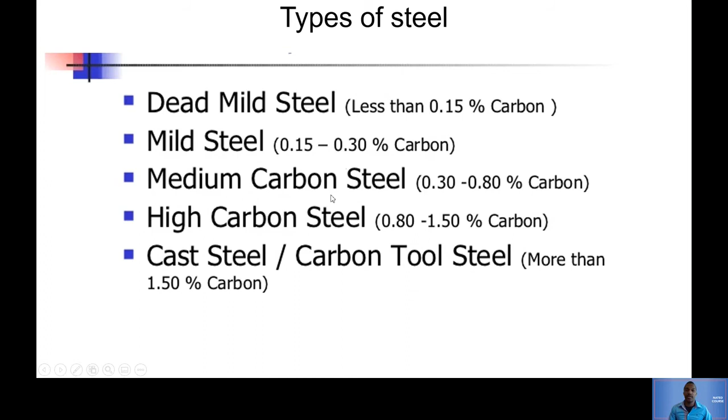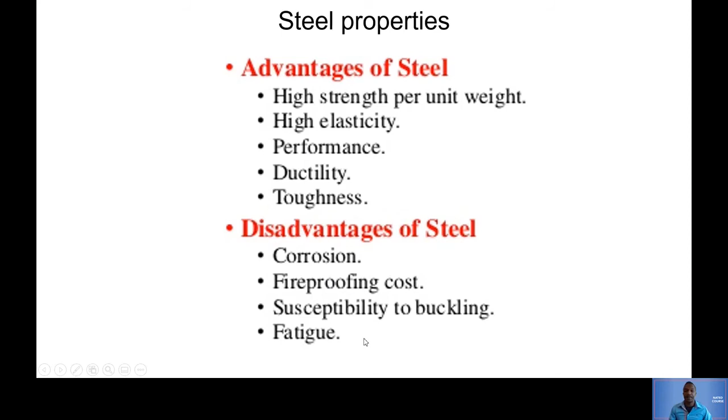Fire safety. So one of the measures you can take to fireproof steel is by putting concrete around it, because concrete is very good when it comes to fire resistance. It can resist fire, concrete.

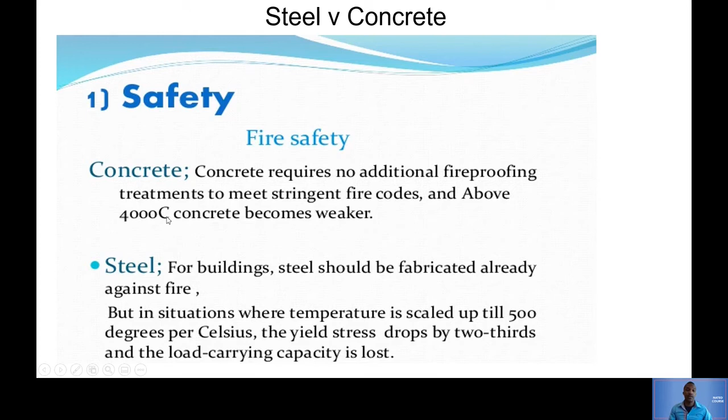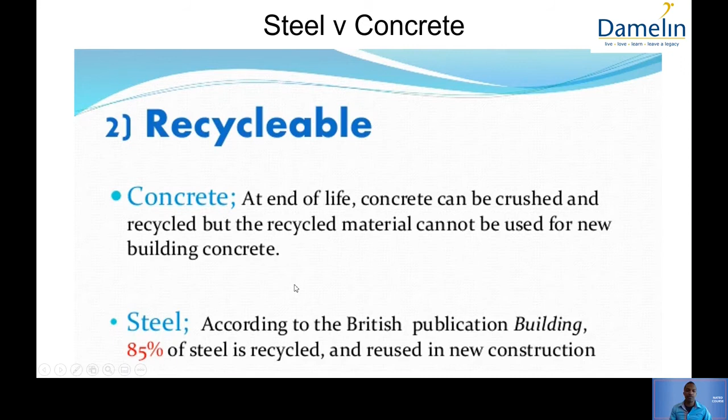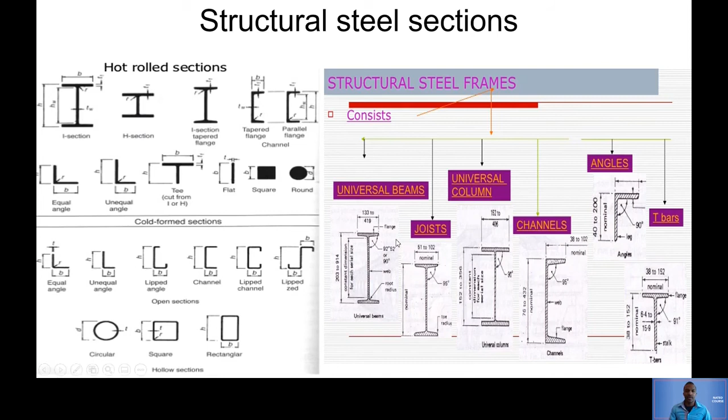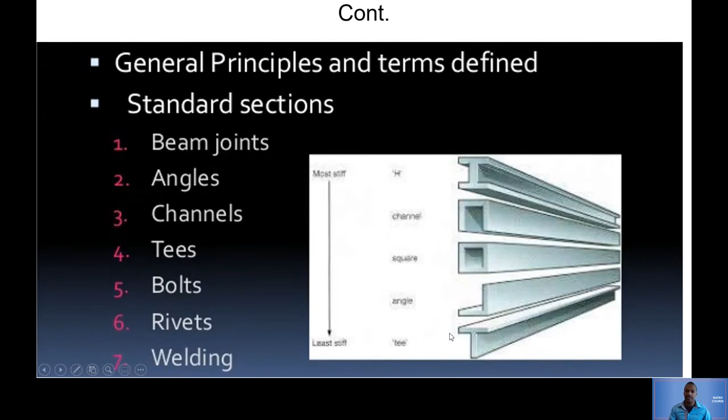Okay, all right. So here we go. General, just the shapes again. That's an H section. It looks like that when it's standing upright. This is a channel shaped like a C, a square. As you can see, it's a hollow square. An angle, it's not called an L, but it's called an angle. And then a T.

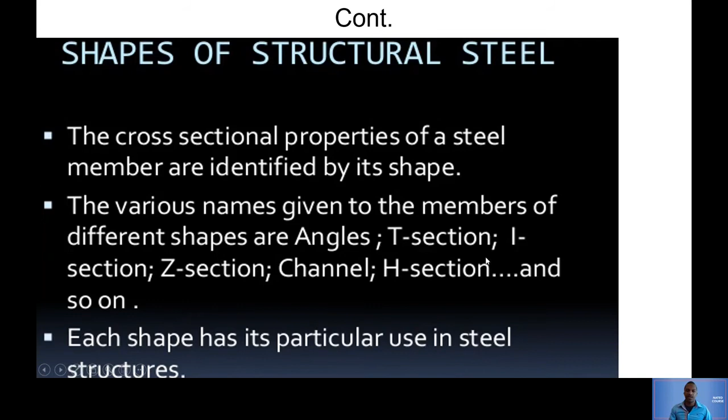Okay, so different shapes. This is just saying that there are different shapes in steel. It's T section, I section, channel, H section - we've spoken about this and you've seen them.

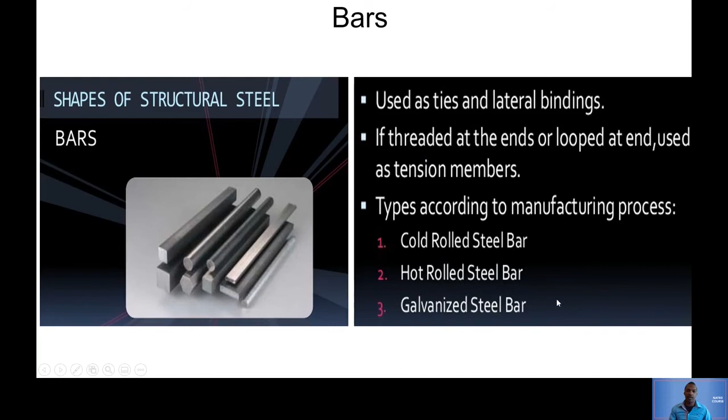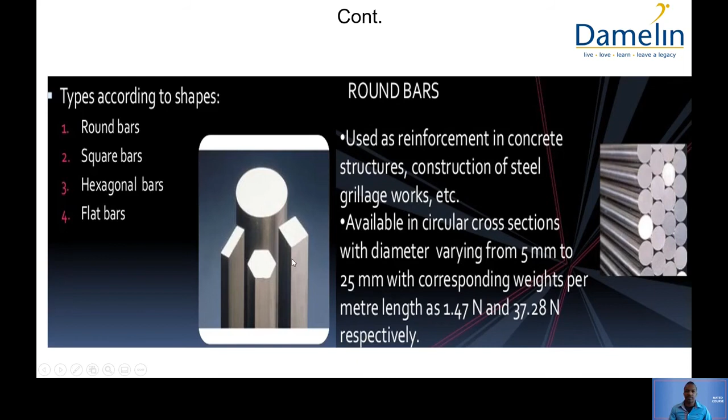Types according to manufacturing process, well, there's different kinds of bars as well. Cold rolled steel bar, hot rolled steel bar, galvanized steel bars - all of these are different types of bars. Okay, so we got round bars, square bars, hexagonal bars, and flat bars. Those are just the type of bars. This is just some information on round bars.

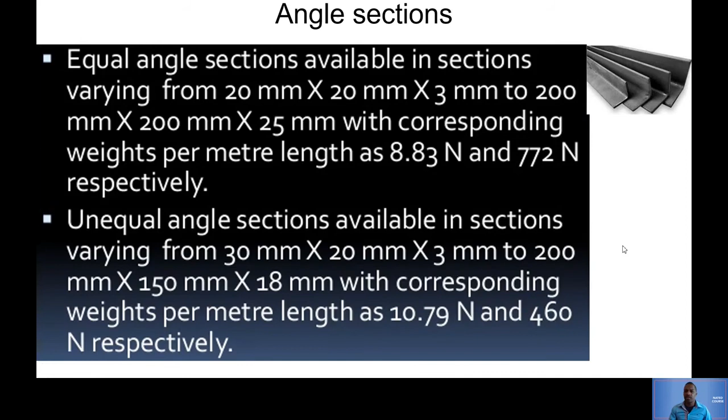Not really important. Equal angle sections available in section - these are just information on equal angles. There is the picture of equal angles. Once again, these are just demonstration of them. More information on equal and unequal angles, as you can see in this picture.

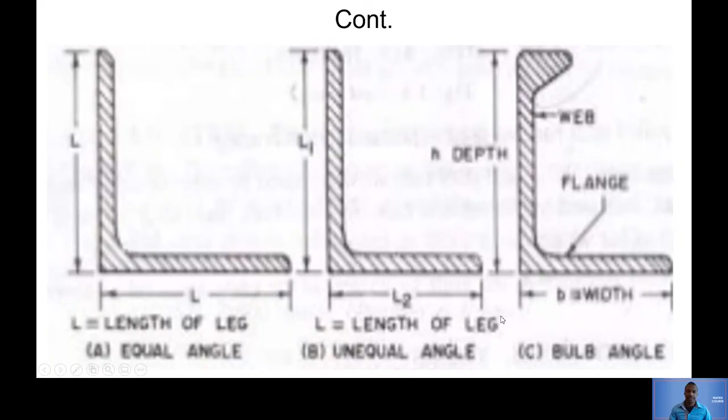Angles. And then channels, there are channels shaped like a C. The reason we're repeating this is so that we can kind of cement it in your head, so that when the exam or test has a question and it asks you to draw a channel, you will know exactly what to draw. It's shaped like a C.

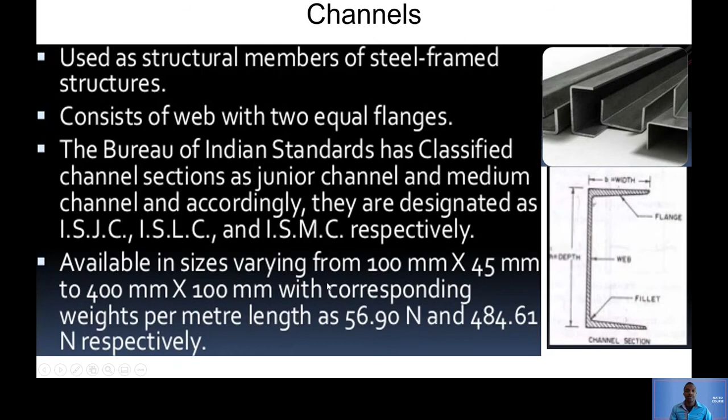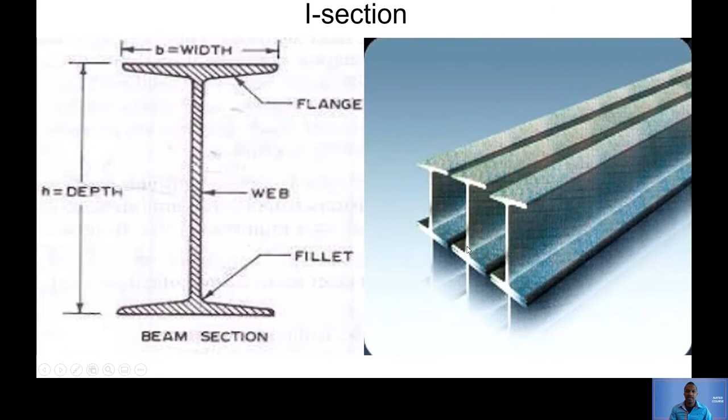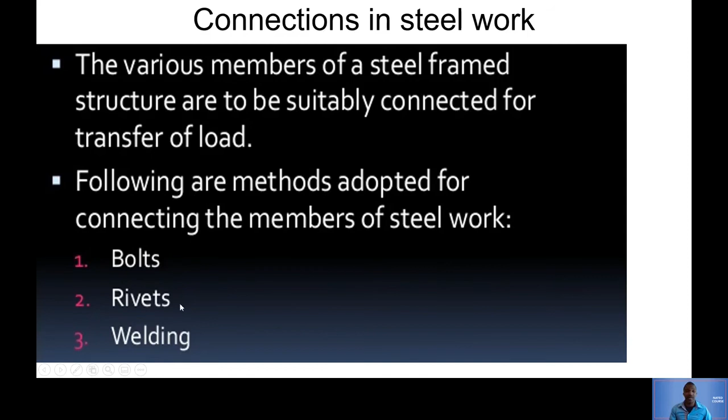Now, the connection of steel, right? So when you are connecting steel, there are basically three ways you can connect steel. Like when you're, let's say you're doing a beam and a beam and you want to connect those two sections, you either connect them with bolts, rivets, or welding. Okay, let's go through each one of them.

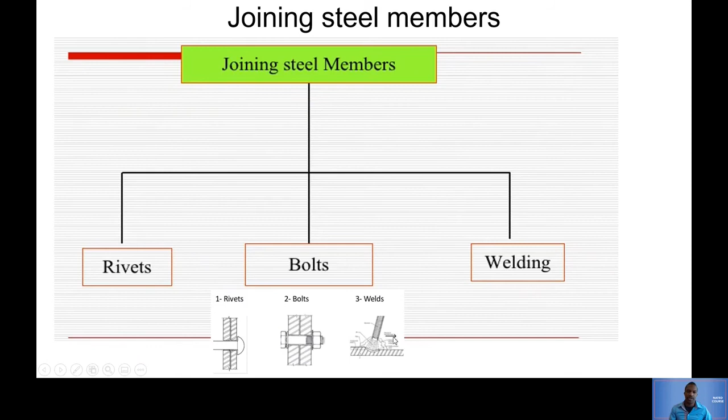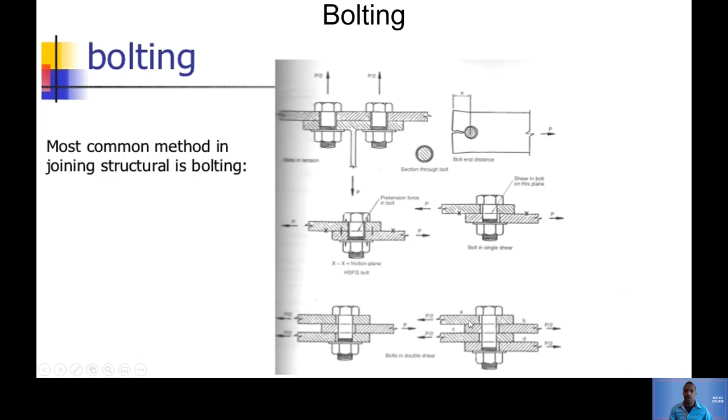Okay, let's talk about bolting. The reason we're starting with it is because it's the most common method in joining structural steel. You will see that everywhere you go and you look up at steel, how it was joined, you most likely see bolting because it's very common. As you can see, these hashed out parts are the two steel members that are being joined, and you use bolts, one on one side and a nut on the other side, just to join them. So you're joining two here, three here, four over there. So bolting is very popular.

It's used when you desire temporary connections, meaning you might want to remove them later. So if you want to make a temporal structure, such as scaffolding, you'd probably use bolting over there. You're not going to weld scaffolding because welding is more permanent.

It may also be adopted when it's difficult to use rivets for connecting members. Bolts are better suited for tension applications. They're very strong in tension because, as you can see, they are very thick and long, which makes them strong.

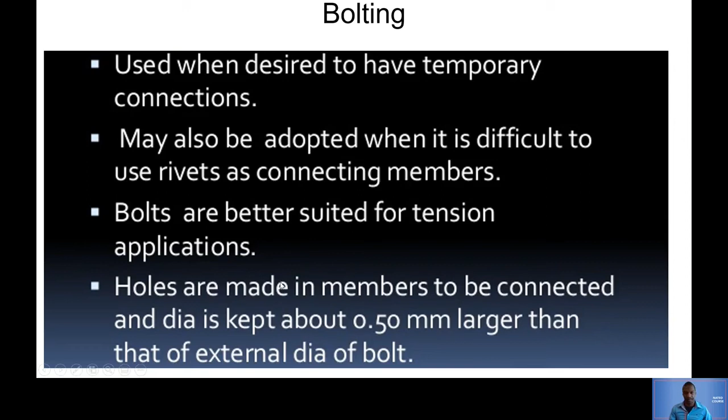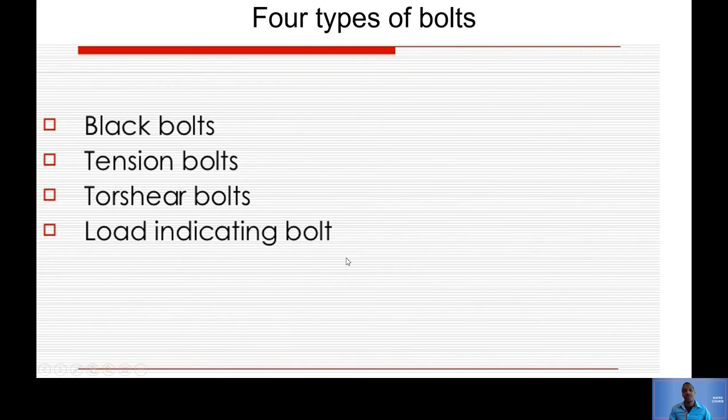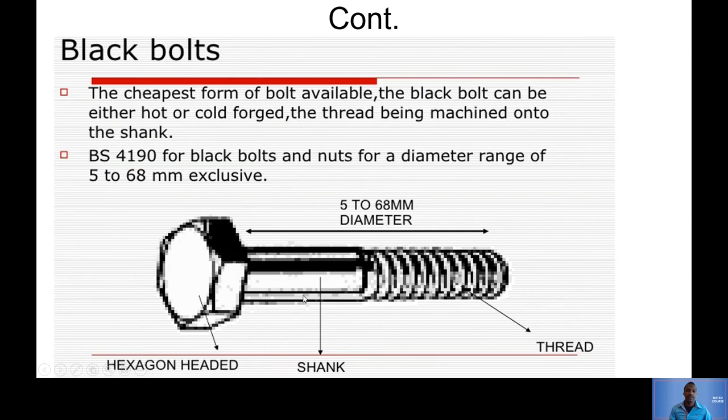So there are four types of bolts: black bolts, tension bolts, Torshear bolts, and load indicating bolts. Let's look at black bolts - these are the common ones. I'm sure you've seen them everywhere; every house, every object made of steel probably has this bolt, because it's the most common.

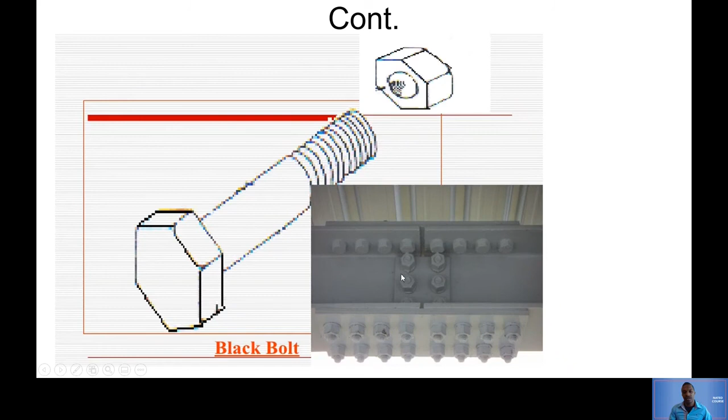Here's a practical example where you can see it in construction. This is a beam and it's got a series of bolts connecting it.

So tension bolts, as you can see, are a normal bolt with a nut and a washer added. This is a washer.

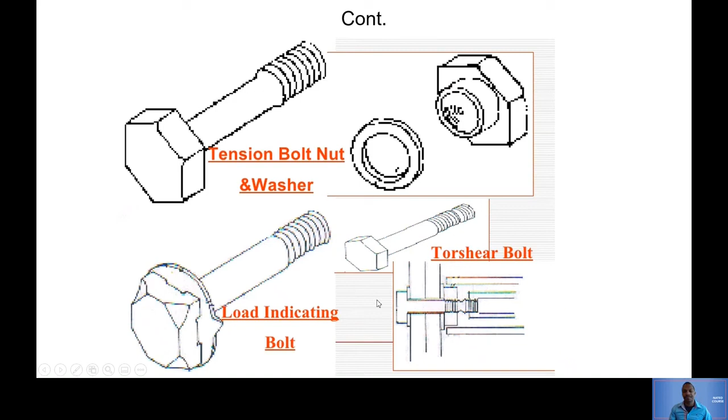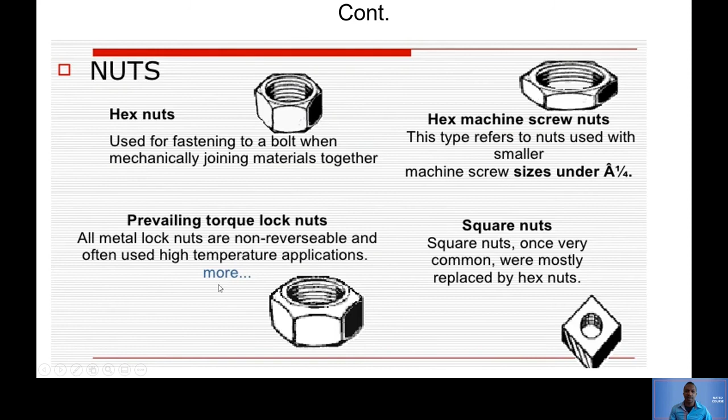So nuts are the connecting member, the screwing member of the bolt. There are different types of nuts as well - these are some nuts with washers, bolts and nuts. They always go together.

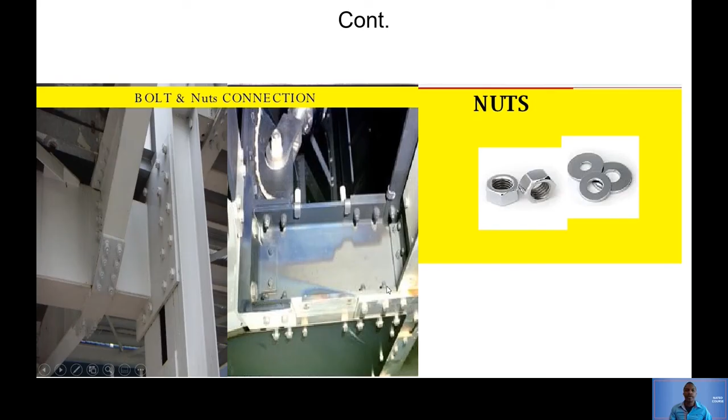Now let's talk about rivets. A rivet is a permanent mechanical fastener - it's more permanent. Imagine a nail, that's basically a rivet. It's a form of a nail, but for steel particularly, we call it a rivet.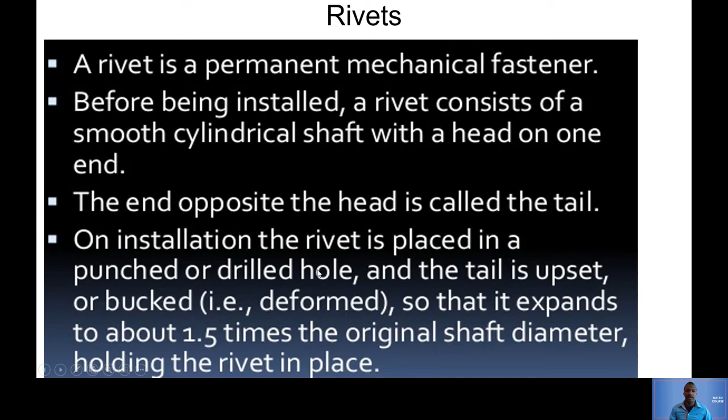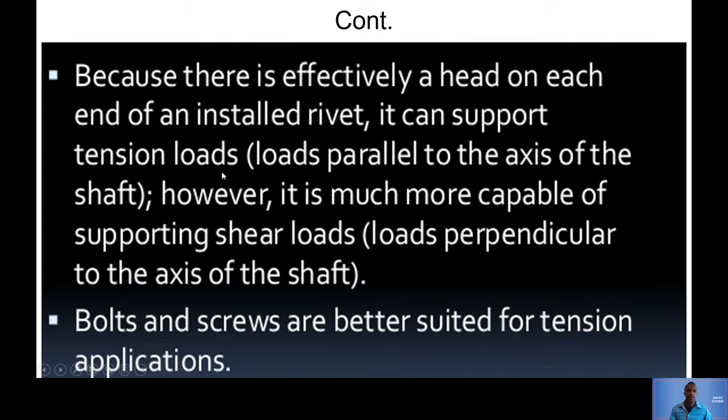Before being installed, the rivet consists of a smooth cylindrical shaft with a head on one end, just like a nail. The end opposite the head is called the tail. Because there is effectively a head on each end of an installed rivet, it can support tension loads, so it's also good in tension, just like bolts.

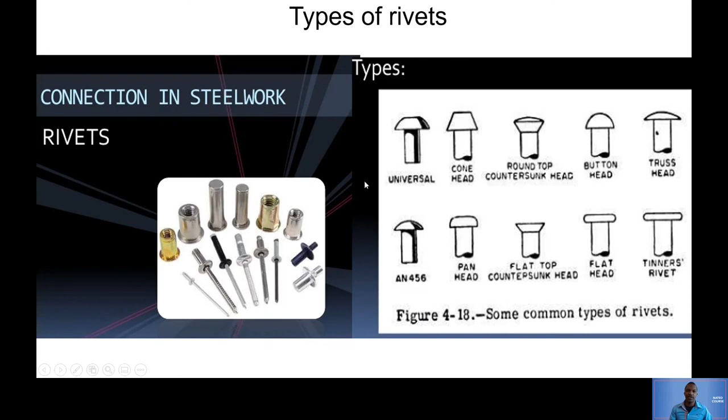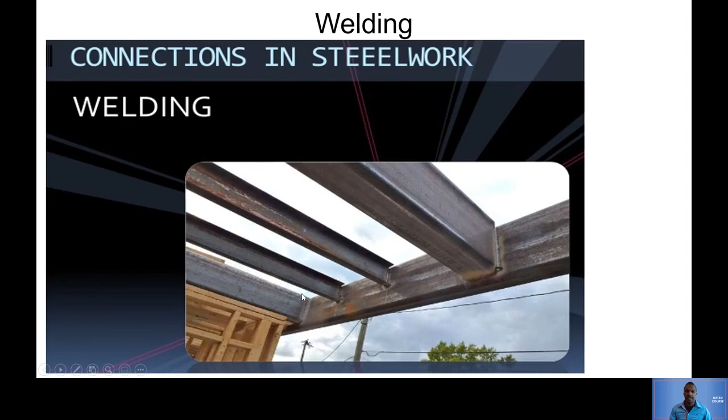Now let's talk about welding. Here's an example of welding. It's permanent. A welding joint is a point or edge where two or more pieces of metal or plastic are joined together.

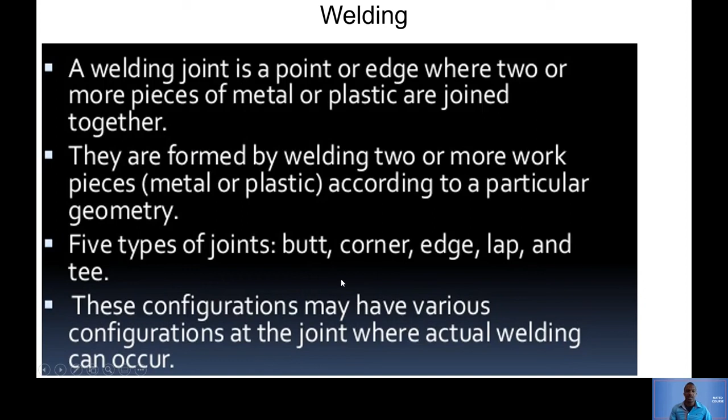There are five types of joints, and it's important to know them: butt joint, corner, edge, lap, and T. Let's look at each one of them.

The basic methods of welding are oxy-acetylene and electric arc. Welds are classified as fillet or butt weld - this is the important part, that it's either a fillet or a butt welding.

A fillet is used on the edges and ends of members, but butt welds are used on chamfered end-to-end connections. Let's take a look at what these things actually mean.

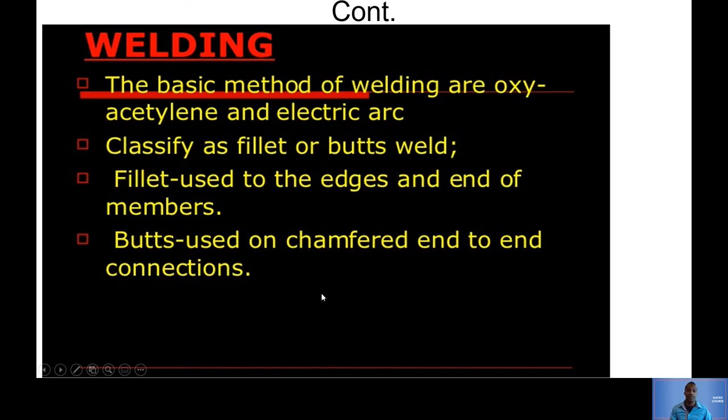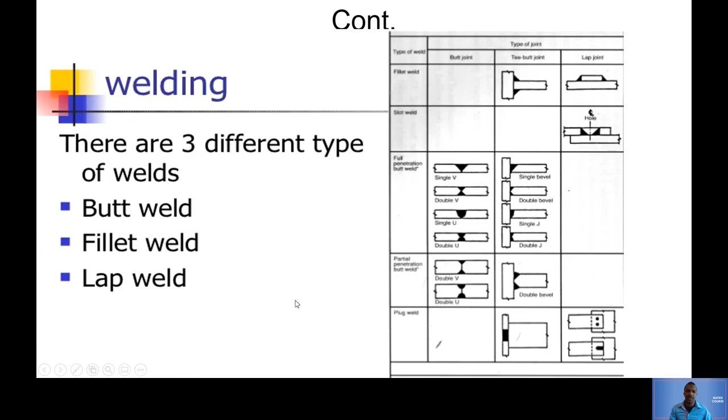Wow, okay, I see. Well, this is not very clear. So let's look at a different example.

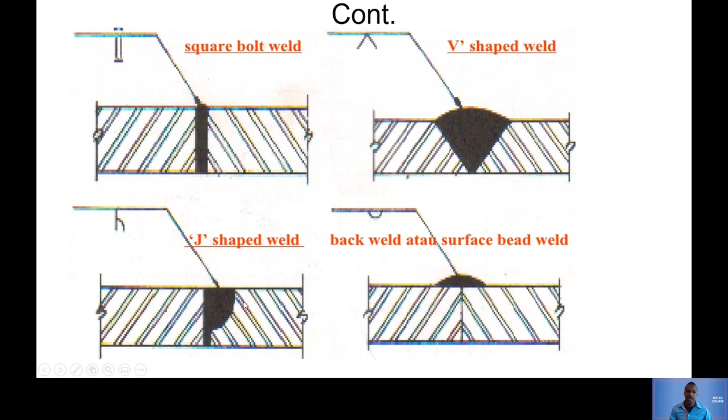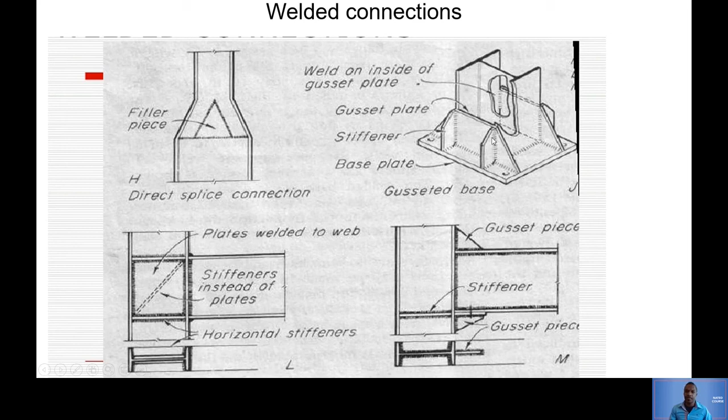Square bolt weld, so this is the welding over here, the black one. V-shaped welding over there, J-shaped over there, and then a surface welding. So if we look at this example here, you can see that there are different members, and all of them are welded, but it's not very clear what's going on.

So these are the types of joints that are done in steel. Either you do column based, which means joining a column to a column, or a beam to a column. A beam is horizontal, column is vertical, or you do a beam to beam joining. These are the types of joinings that you can do.

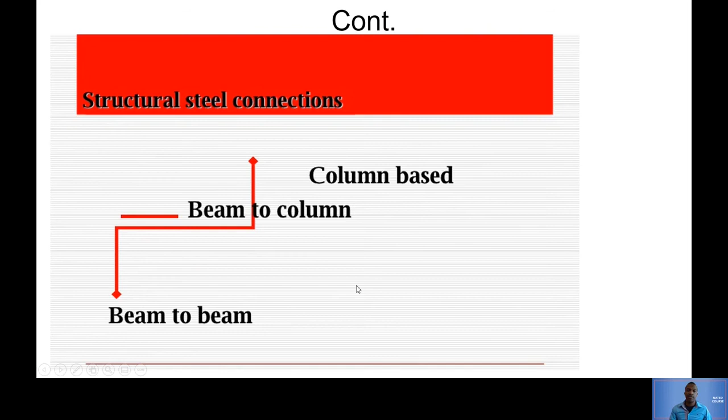Now, in doing those types of joinings, you can use bolts, rivets, or welding, depending on which one, or a combination, depending on your design. Okay, so here is a column-based design.

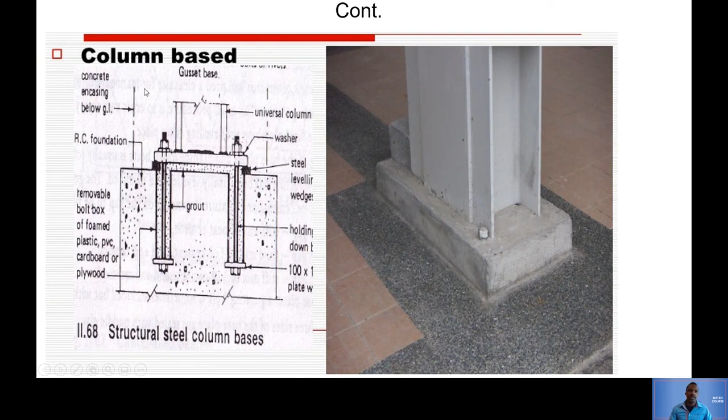And then, as you can see, the bolt goes all the way until the end there, where it's fastened with a nut. And then grouting all around, just to make sure the foundation is stable. So this is column based, so it's just a column at the bottom of the column.

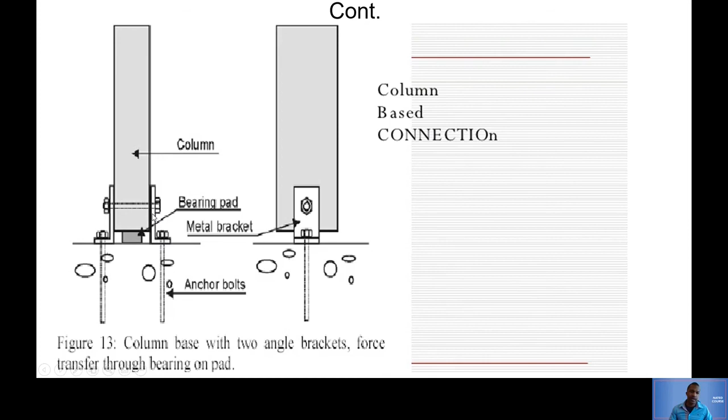All right, this is another example of a column base. You can see this is, what do you call this? Remember what an L-shaped section is called? It's an angle. So as you can see, one part of the angle is anchored to the foundation, and then the other one is anchored to the column itself.

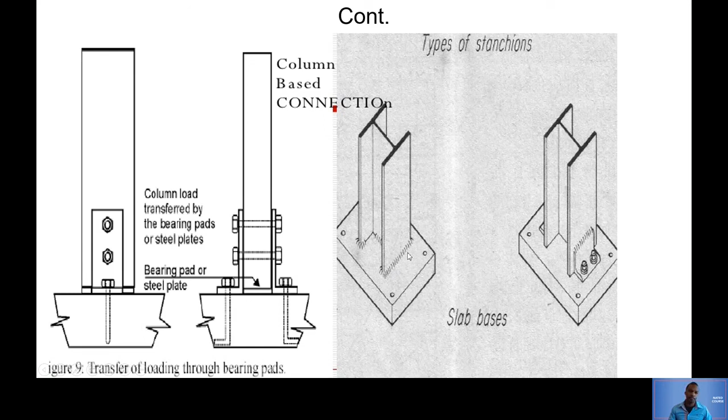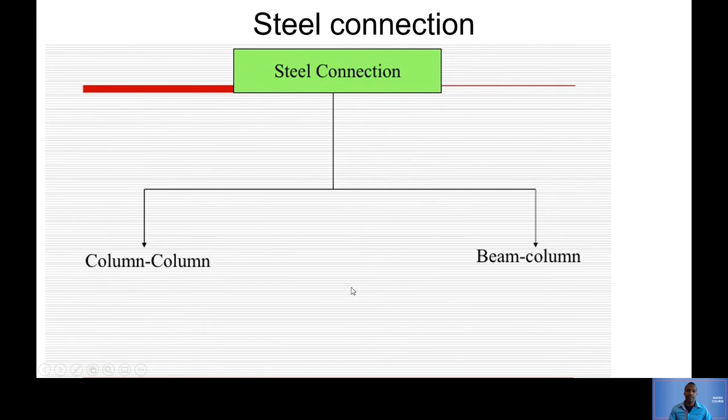Okay, and then this is just another representation of the connections that are made. It's either you do column to column or beam to column. So here is an example. This one looks a little bit weird, but let's take it little by little.

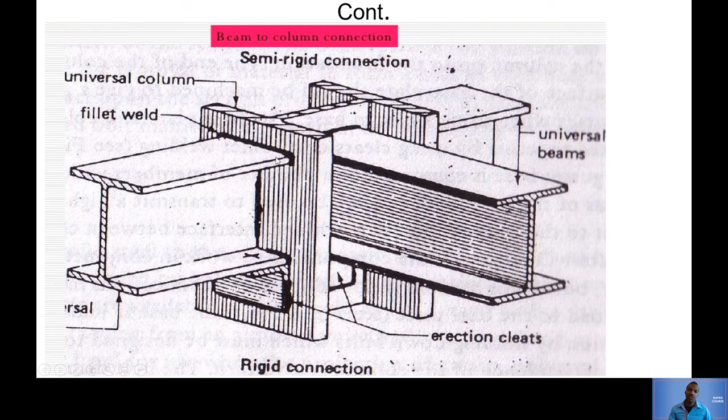So this is a connection between a beam and, well, 3 beams. 1, 2, 3. I don't know if there's a 4th one on the other side that we can't see, but the important part is that we're joining beams to a column. That's how it looks like.

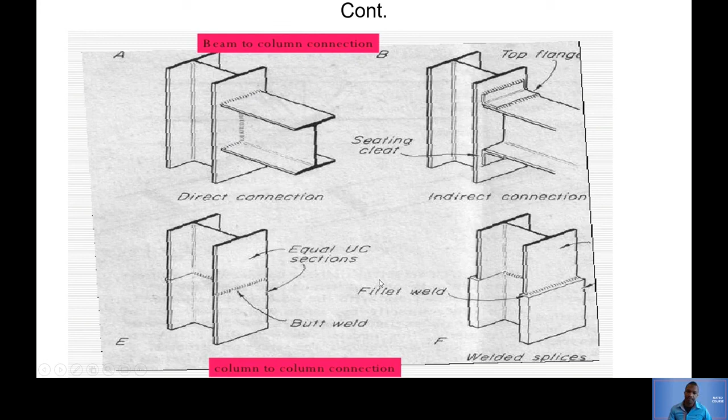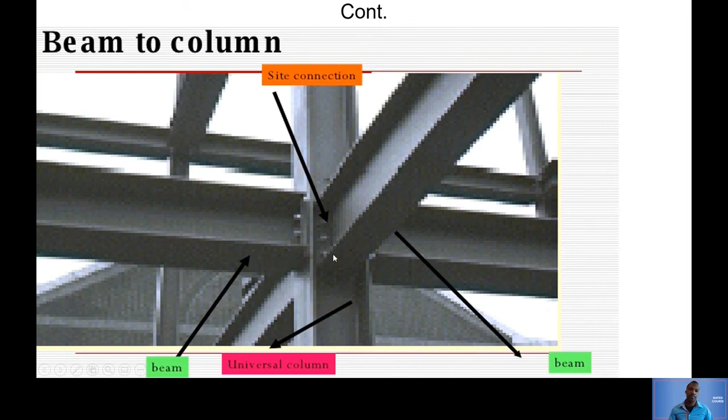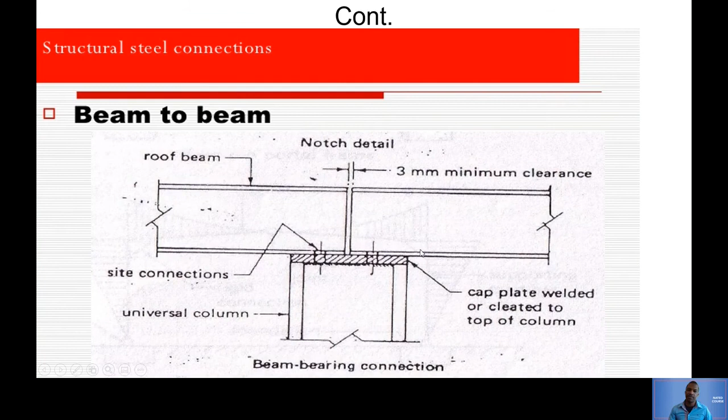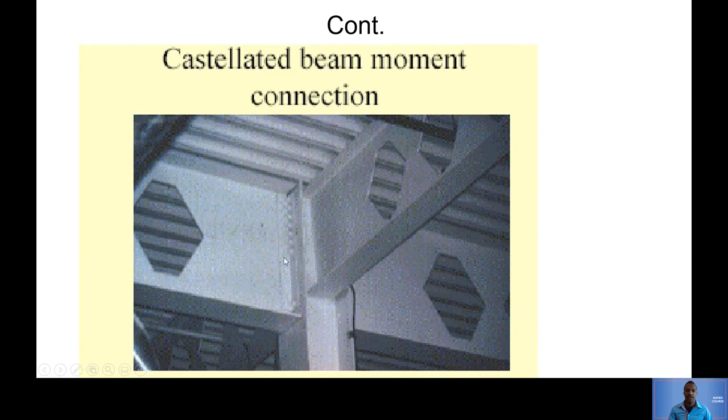Let's look at it as well, a more practical example, beam to beam, beam to beam. Even though there's a column, but really what we're focusing on is the beam. As you can see, the beam, once again, I section.

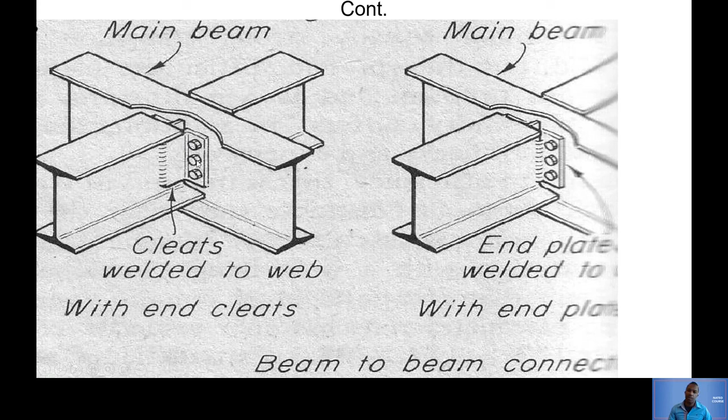Okay, so here's a beam to beam connection. As you can see, you also use an angle there to join a beam to another beam with bolts. Okay, it's another example, beam to beam with bolts.

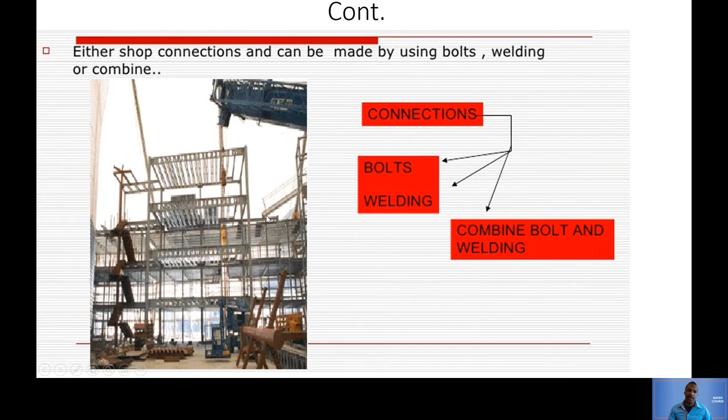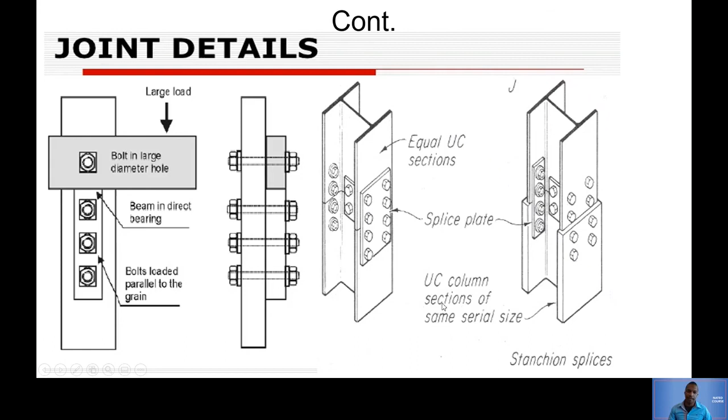There we go again, column and beam connection. Now in the exam, they can ask you to draw any of these. I think my idea was just to demonstrate it to you how it actually looks in many of those examples.